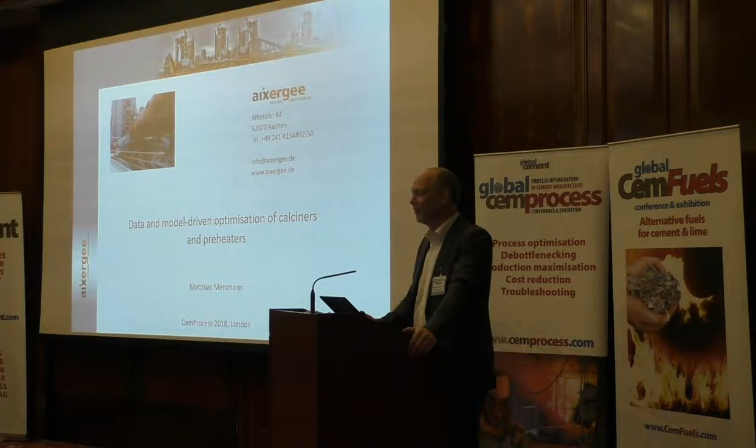Thank you, Rob, very much for this very nice introduction. The hobbies I execute absolutely in that order of sequence, as you have mentioned that. All joking aside, thank you very much for attending this presentation today.

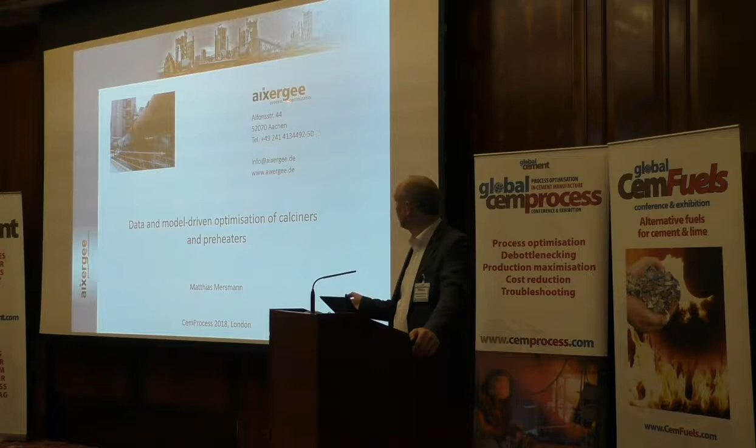Let me spend a few words on aixergee before I get to the content of my presentation today. Some of you know aixergee as a service provider for the cement industry, and we are probably most recognized for our CFD modeling and our CFD consultancy services. That's not wrong, but it doesn't tell the whole story and doesn't reflect our motivation. Our motivation is captured by the term in our logo, which is process optimization. Our main target is to optimize processes, and that's why we are working at the very root of what this conference is all about, the optimization of production processes in the cement industry.

What we carry to the market is know-how, knowledge about the physical and chemical processes involved in the production of cement in all its various steps, from raw material grinding over clinkerization down to cement production in the mills. We focus on the physical and chemical basics of the processes involved, and then we cast this knowledge into models. These models can be of various types - they can be CFD, they can be process models, they can be all kinds of things, and I will show you in my presentation what this means for you.

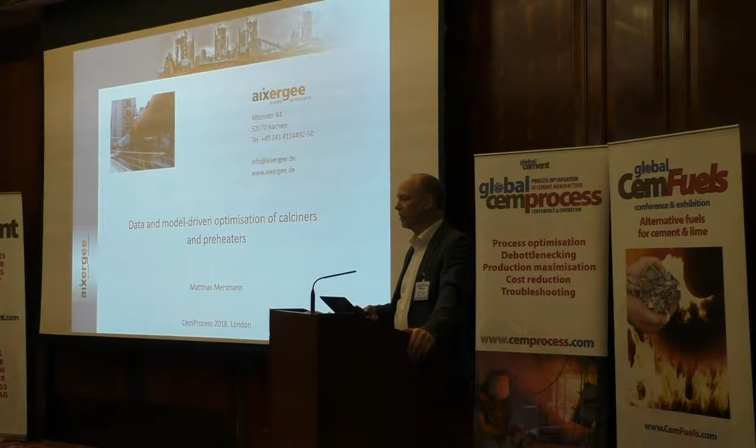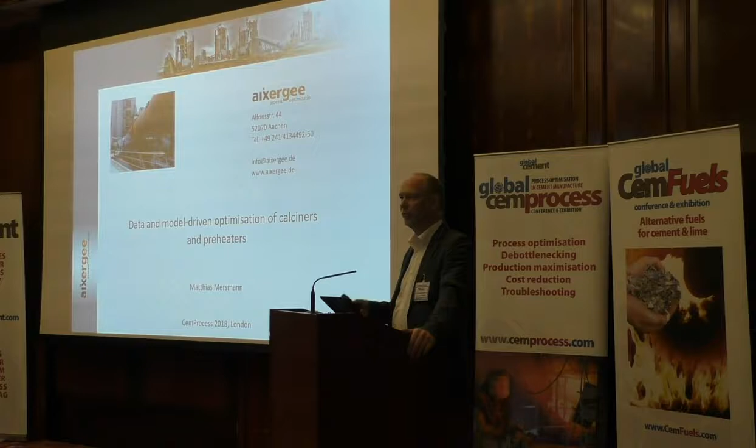We've been listening to the buzzwords already many times this morning. What is driving us these days is Industry 4.0, Internet of Things, machine learning - all these buzzwords. Klaus Beck put it very right when he made a statement just before the break: we have to interpret what does it mean for us. Industry 4.0 - everybody's talking about it, but we as a cement industry have to interpret what this means for us.

In that sense, I am happy to present to you today a new tool which we have added to our toolbox that gives us the position to optimize calciners, preheaters, and other cement production equipment with data and model-driven optimization. Marie has also pointed out in her presentation today that we are getting together all kinds of information on the production process to learn more about it and then to optimize it.

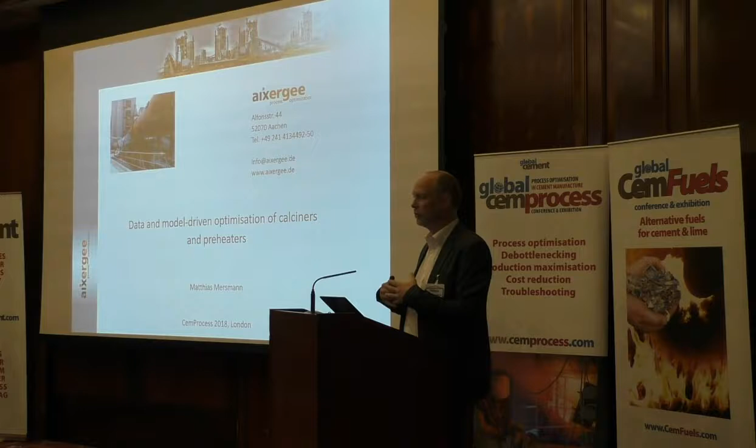Model-driven optimization and data-driven optimization are two different animals. Data-driven means you take the real data and try to analyze what is going on, whereas in model-driven optimization you set up a parallel world, a virtual reality, and then you compute forward how this process would behave. Now we are in the position to marry those two together to mutual benefit and transfer information from one world to the other, steadily increasing our process understanding.

So let me start off with a very funny, maybe unexpected question. What do process engineers and archaeologists have in common? I don't know whether we have archaeologists in the auditorium. We have one specialist in geoscience, I know - so maybe Rob can add something to this discussion. Is it the love of beer? Is the love of beer, and another thing I'm going to talk about.

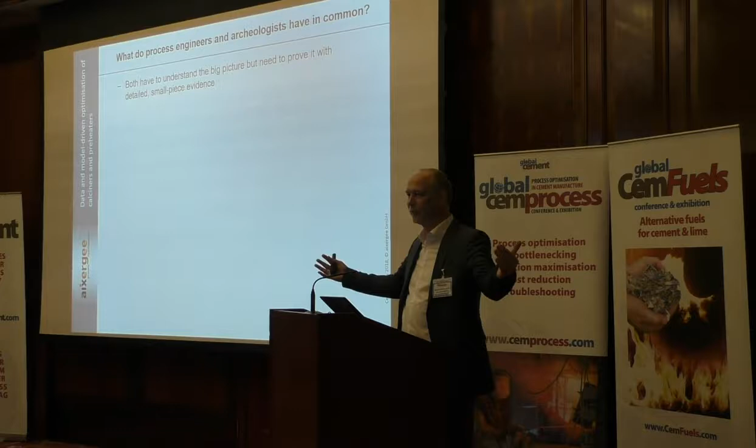You might feel this question to be strange, but I'm going to show you there is actually a lot they have in common. First of all, they both have to understand the whole picture - like, for example, why did the dinosaurs get extinct? But they have to justify and argue that on the basis of small pieces of evidence. If a process engineer is asked the question, why is the kiln capacity limited, why don't we get more out of our kiln, he will be digging for information from the data system of the plant to try and find an explanation why the kiln is getting

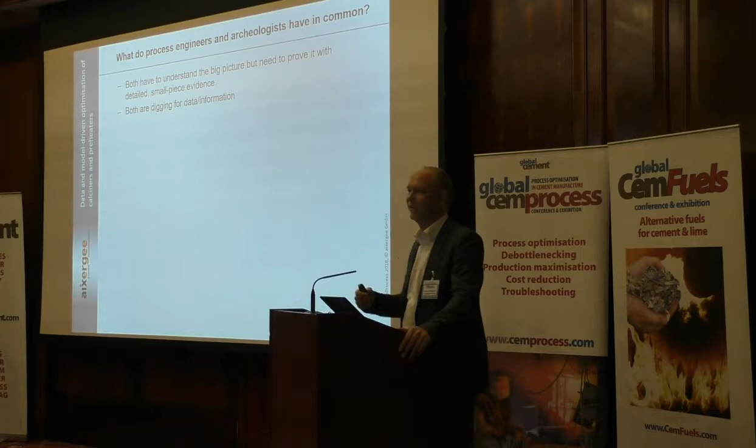unstable and the production is limited. So it's sometimes like looking for the needle in the haystack, and the archaeologist has the same problem. The usual thing we do as process engineers - we spend probably 50% of our time digging data in the process control system and trying to find an explanation. Every time we think we have found an explanation why the kiln got weak, somebody else looks over the data and finds a counter argument and says no, this is not because of that, it's because of that. So that's how we spend our time, and I think many of you know what I'm talking about. It can be very complicated to try to understand and read the data.

So the challenge is where to dig. If you are an archaeologist and you want to try to solve the question why the dinosaurs got extinct, you will probably be looking for a skeleton or a bone to analyze. But the first question is, where do you dig? So where to dig and what is the right tool to find it? Next question is how to dig.

I ask you to transfer this always to our process engineering. If I'm talking about digging, where to dig in the massive data we have. How to dig: better to dig in a big area but only on the surface, or to drill a small but deep hole. To put it into perspective, as a process engineer, if you're looking for the reason of the swinging calciner temperatures, you can evaluate all the data from the complete plant but only in half-hour or middle average values, or you go only for the 10 data points related to the calciner, but then you analyze them for every millisecond. You will get different results from it.

Next thing is how to stay focused. You will be getting lots of data, and I personally know some people in the auditorium we had projects together with, and we spent days and weeks looking into data, analyzing it, and we got confused. We analyzed data till our eyes rolled, and we didn't know where it was left and right and up and down. I think you have the same experience.

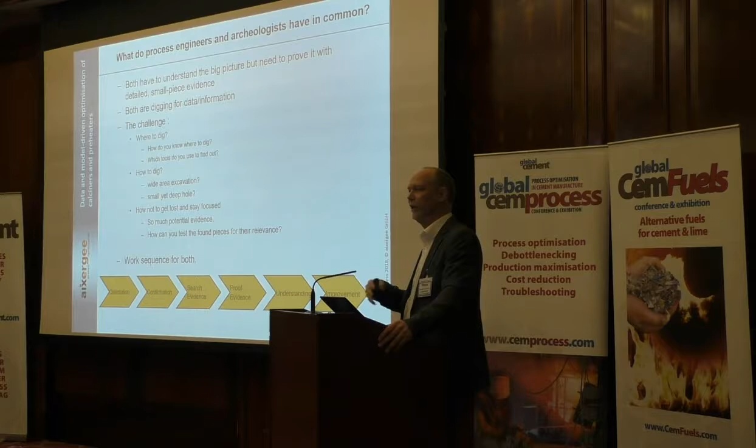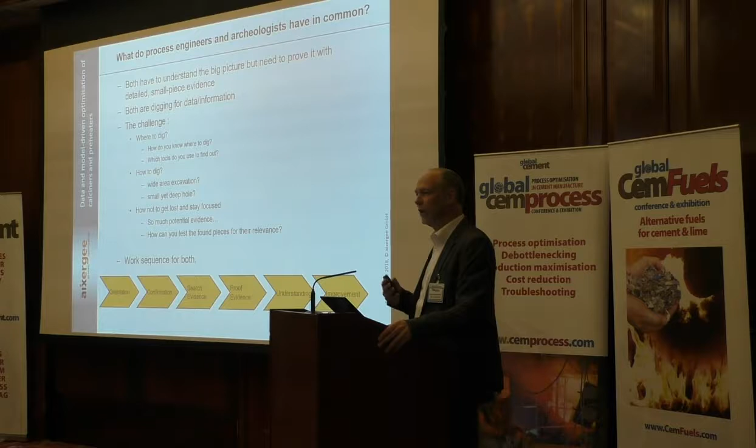I'd like to take you now along this workflow for a process engineer and an archaeologist, and visualize what challenges, what questions will be put. Let's assume, for example, there's an archaeologist who has set up the hypothesis that the dinosaurs got extinct in England because of malnutrition. I don't know why I come to this picture, but we'll see. And a process engineer is trying to answer the question why the kiln production capacity is limited.

So let's start with the first phase, orientation. The archaeologist would first have to answer the question: where to build my camp? Where do I go? Do I go to Chile, to London, or Staffordshire? I don't know. He will be using maybe airplane or satellite exploration to find information on the soil, which gives him an indication this is the right area. The process engineer has the same challenge. He would be asking himself, which are the operation parameters which influence my problem? And there are thousands.

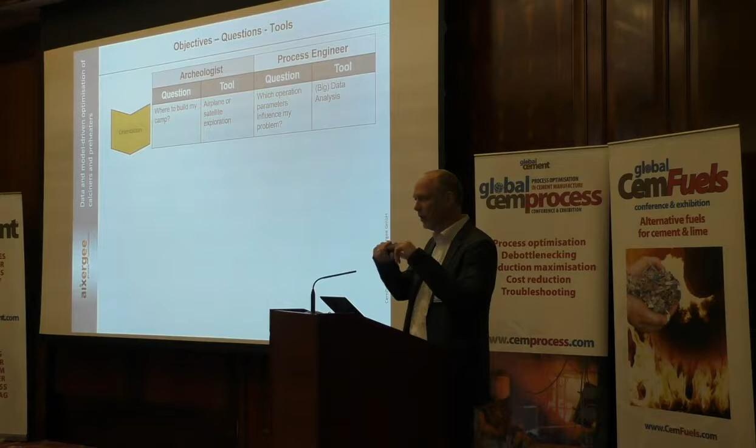The usual way to do it is data analysis. This is where we spend our time: we take trend data from the PCS and then we analyze until our eyes get rolling. And this is the new thing I want to present to you today. We have developed algorithms and tools which help to analyze this data in a certain way. I will give you more details later on.

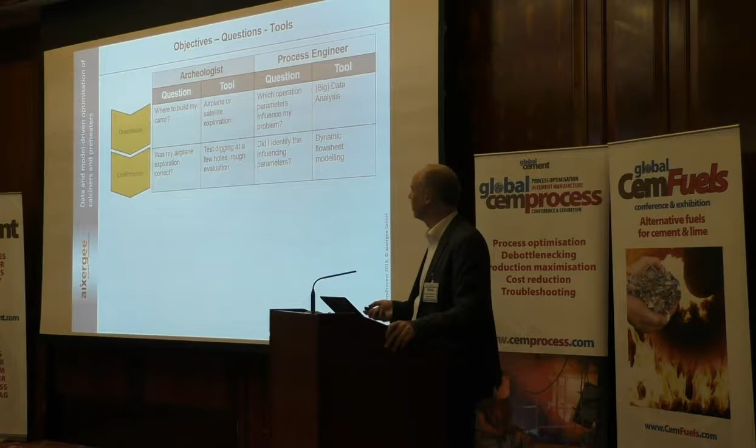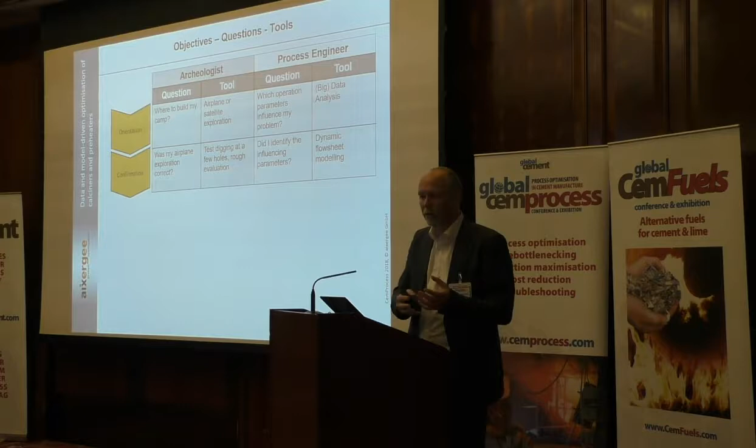Next step, you'd like to confirm that you are digging at the right position. So the question for the archaeologist would be: was my airplane exploration correct? And he will do some test diggings at that ground. The process engineer will have the question: did I identify the right parameters, or am I in the wrong position, the wrong area of the cement plant? We can do that by applying dynamic flowsheet modeling. I will tell you the details later on. Those are tools which we have at hand in our toolbox, which we can apply to such projects.

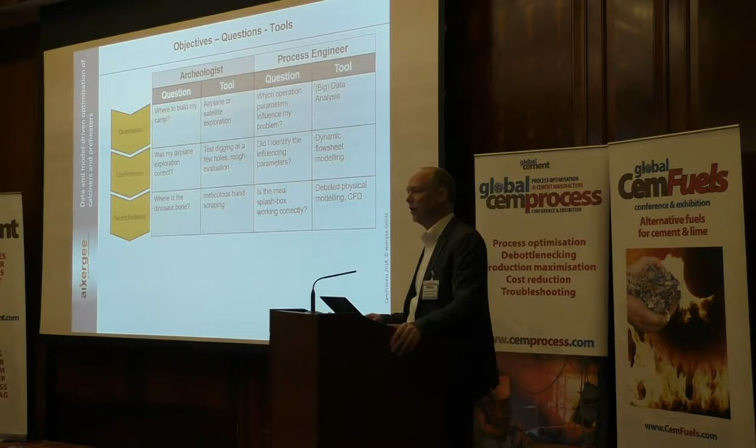The next step is the search for evidence. The archaeologist would ask: where's this dinosaur bone? I want to have a skeleton, I want to have a bone, because I want to analyze it for nutrients and all this kind of stuff. He will take information from this bone, and he will have to hand scrape meticulously, getting down on his knees and scraping millimeter by millimeter until he finds evidence. On this detailed level, we would be using CFD - very detailed, rigid, physically driven, chemically driven, first-principle modeling. For example, if we suspect there's a meal splash box which is not working correctly, maybe this meal box doesn't suspend the meal correctly.

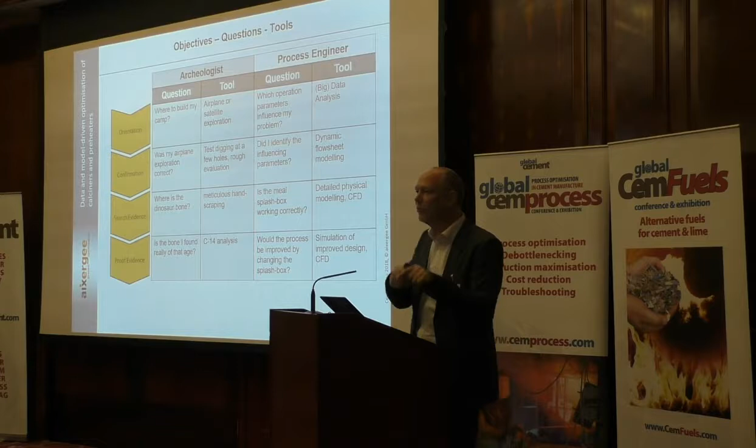This is one detail out of 10 million possibilities in a cement plant. And if you look at the data set from above, it's not so easy to arrive at the interpretation that it's just this meal box that's not working. So then it's also important to prove your evidence. You can find something, but then you still have to show that this is actually the one causing the damage.

So the archaeologist might have found this bone, and he will run it through a C14 analysis, for example, to define the age of this bone, to say, well, this can really be a dinosaur bone, or maybe it's a pig bone that just happened to come to the same place later on. So you have to prove your evidence.

And the process engineer would have to ask himself the question, would the process be improved if I change this splash box? Because if it doesn't change, then obviously the splash box isn't the root cause for this problem. For that reason, he would apply a simulation of an improved design and again use a very detailed CFD to prove that a change of design would actually change the whole process.

And finally, the stage we have to go to is understanding, which requires taking these results, discussing them, and getting them into the bigger picture. Like, for example, the archaeologist would sit down with other experts and say, okay, how could I testify the malnutrition in that bone I found, or maybe there are other reasons why dinosaurs got extinct.

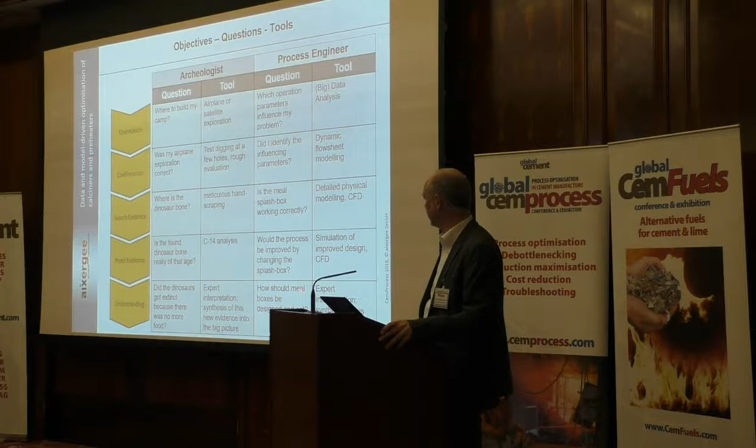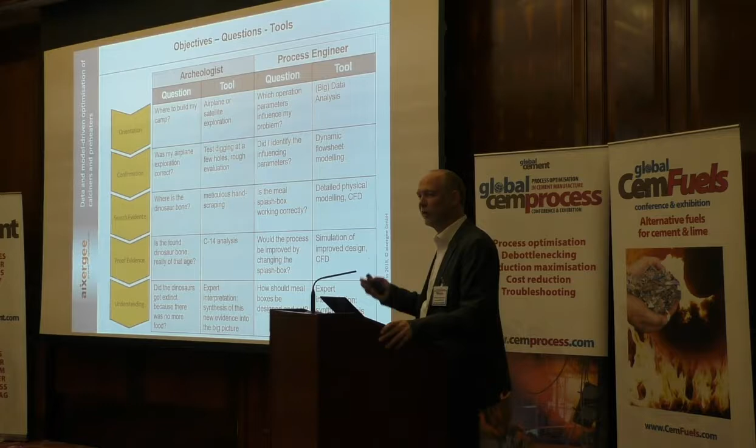And the process engineer would take it to the next level and try to derive from his finding a general rule of how to design splash boxes. He would also have to check whether there is such a thing at all—a general best design—or isn't it more the case that one design would be good for this application and another design would be good for another application. So this is the level of understanding, and that's where we want to go.

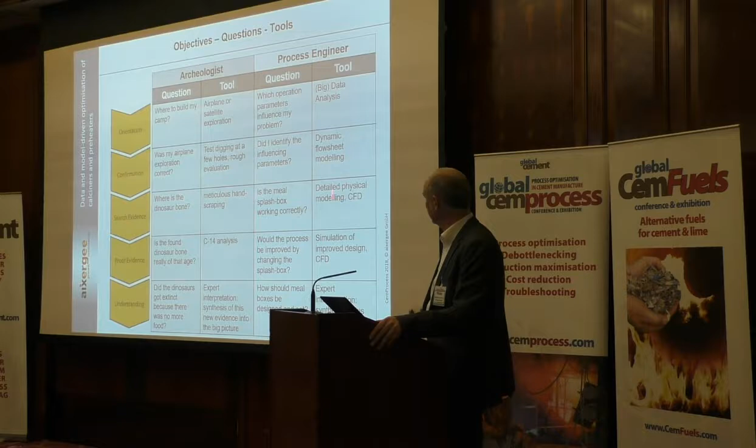And now I'd like to walk you through this step in more detail for the process engineer and show you what the tools are which we can use.

So we're starting again with the same objective. Our kiln production is restricted. We see fluctuation in the kiln operation, and we have to overrun the main burner in order to make sure we're producing quality. It's a well-known problem many people have in their cement plants, and we're trying to find out the root cause for it.

The archaeologist is excavating a wide area. In process engineer's talk, we're looking at the data set of the complete plant. We've been told in the previous presentations, especially the one from Fabio in the morning...

...that, for example, Votorantim, but also other suppliers, are actively pursuing this digitalization agenda, so they will be looking at the complexity of their data and trying to find out how they can extract information from it. Same thing we are doing here.

So we would say, I'm sure the reason for my process limitation is somewhere here, but where is it? Where in the hell is it? Our natural response as process engineers would be to say, if I have a weak rotary kiln, probably it's in the rotary kiln. But if we dig deeper and deeper and deeper, and I look into your eyes, I know you're saying it's right what I'm saying.

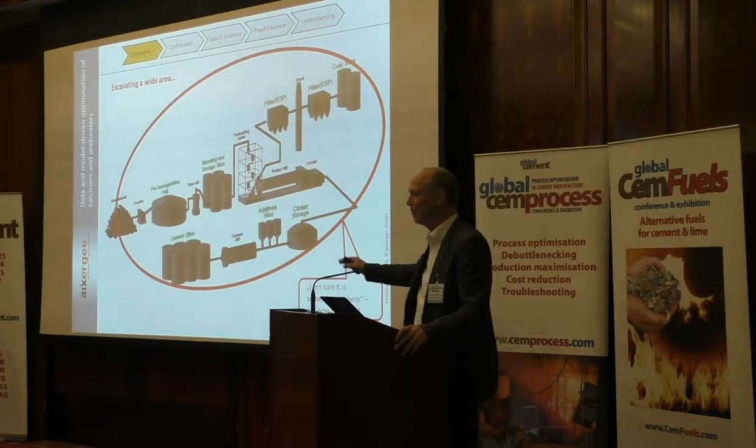Talking about alternative fuels, it's a nightmare. And previously we have been discussing—you have been asked, Mary—wouldn't it be just better to have a stable running process with stable feed materials? Yes, that would be nice, huh? No chance. Reality is completely different.

So potentially all those areas can contain the root cause for our problem. So how do we do it? We usually sit down and evaluate trends. We have 10,000 signals—some of them in seconds, some of them half-hour values, whatever. We sit down, pull up trends, and then we analyze these trends and develop hypotheses, sometimes stranger than the universe.

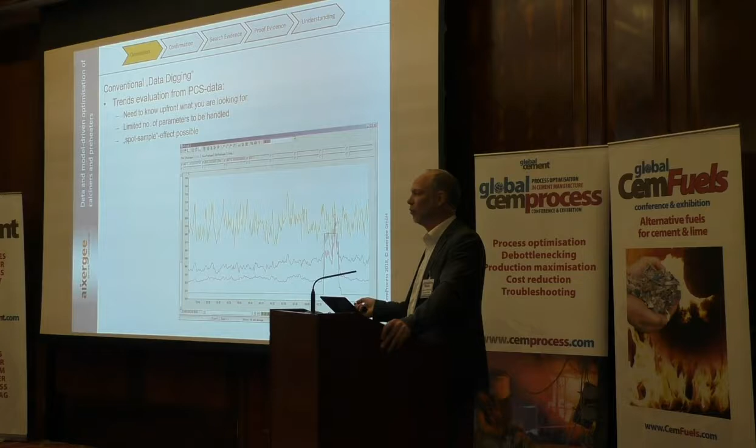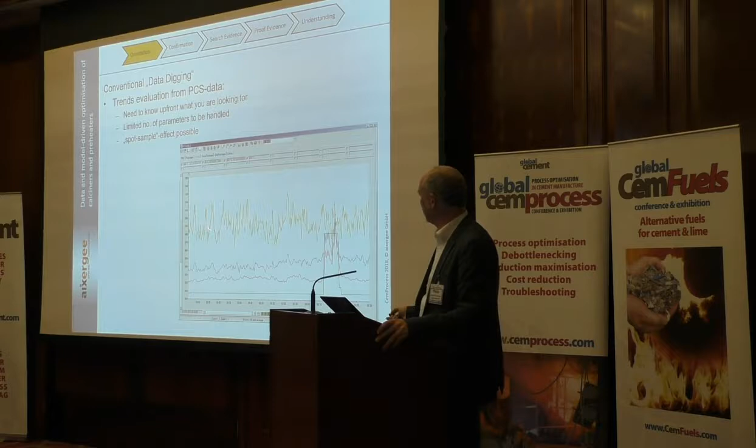The problem is, we automatically connect our knowledge to it. So the trends we put on here, we put them on because we believe they have an influence, but we don't know. And we cannot put 10,000s on it. We can only put 6 or 10 on it, then we lose control. So this is the way we do it, but it's not necessarily the best way to do it.

What we propose here, and this is what we've developed new, is algorithms that help us doing so. So we take a comprehensive data set from the process control system, and we have algorithms in place that analyze them without influence of process knowledge. It's the maximum stupid machine, and it's just trying to find out coherent, coincidental data sets.

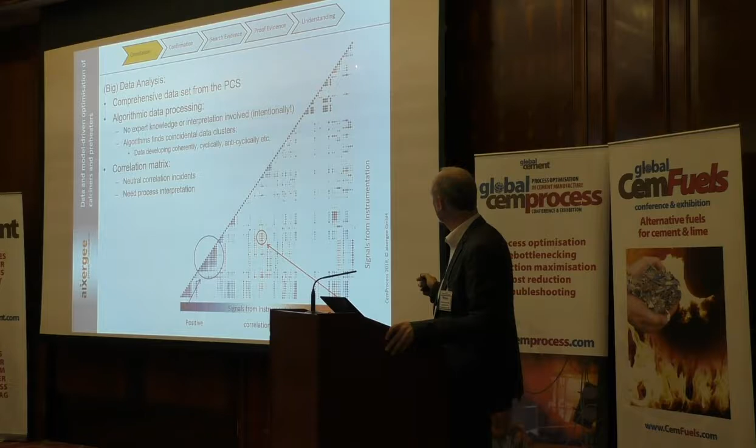So the matrix that is produced by this algorithm can be seen here. It's of course not well visible, but these are the data, the signals set against each other. So like for example, you would have preheater cyclone exit temperature 2 and preheater cyclone exit temperature 3. Do they correlate? Which means, do they go with the same movement or with a counter movement? Do they go in the same frequency or a different frequency?

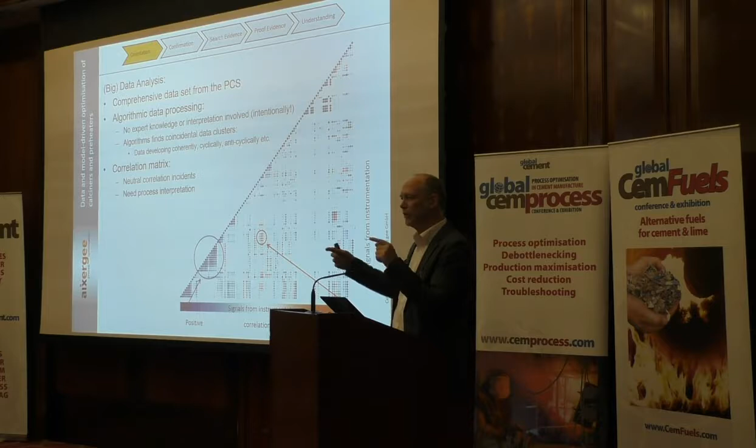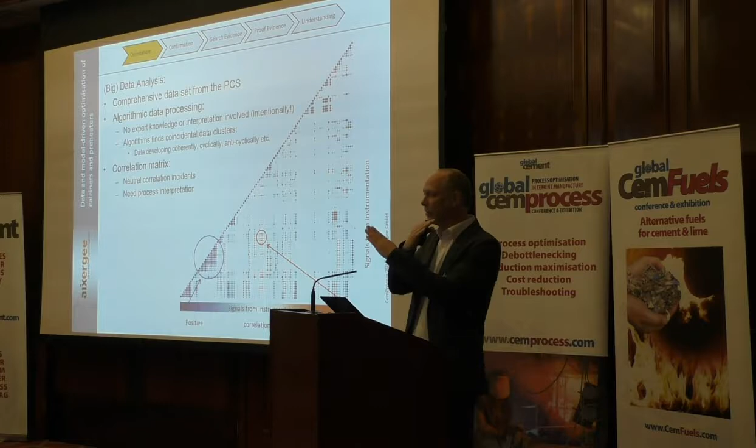There are certain characteristics which are ready to be analyzed on, and what the system does, it displays a big dot if there's a big coincidence, and a small dot if there is no coincidence. And it displays a blue dot if it's a positive coincidence, and it displays a red dot if it's a negative coincidence. So what you then do, you take those spots, those areas where there are big spots, because the functional relationship can either express in a coherent or in an anti-coherent way. So this gives you hints where you should look at.

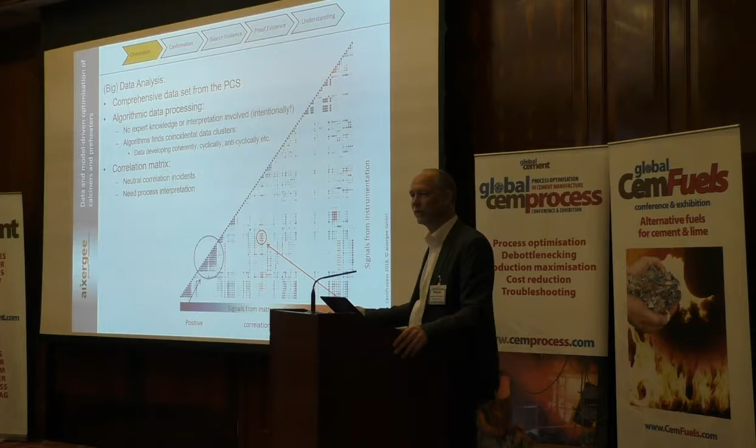This is like an airplane survey for an archaeologist. So this tells us, oh, we have to look here, we have to look here, we have to look here. And all this, of course, relates to measurements, and they relate to process equipment. So now we have narrowed in our territory, and we might have found out that we have to keep on looking for the root cause in this area.

We now use dynamic flowsheet modeling. We insert our knowledge into dynamic flowsheet modeling. The identified parameters and the models are put in place. It's like an Excel tool, but it's more elaborate because it also can use counterflow processes and provides a lot of advantages to use this tool instead of just trying it at the plant.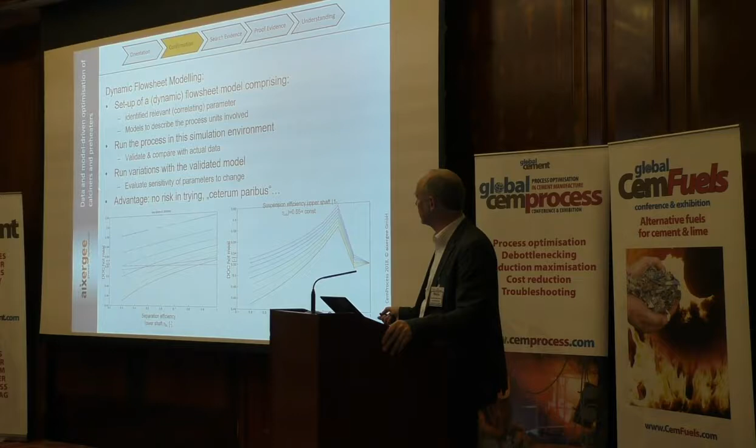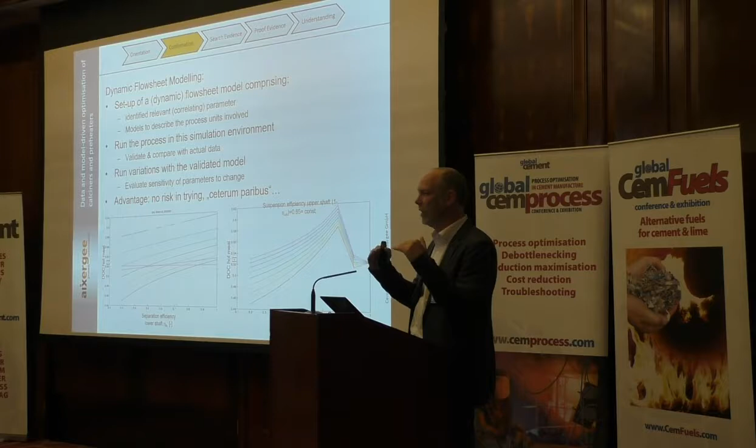You could also go and try it at the plant, but you run the risk of damaging something and you don't get everything, all the other parameters stable at the same time. With this dynamic flowsheet tool, you keep everything alike, you change one parameter and you see the reaction of the process.

And this is an example of such a thing. This is a very strange calciner which we have set up in a dynamic process model flowsheet. You see those red boxes here. These are basic process units like mixing, heat transfer, separation, and all these kind of stuff. So we model the process on basic process units.

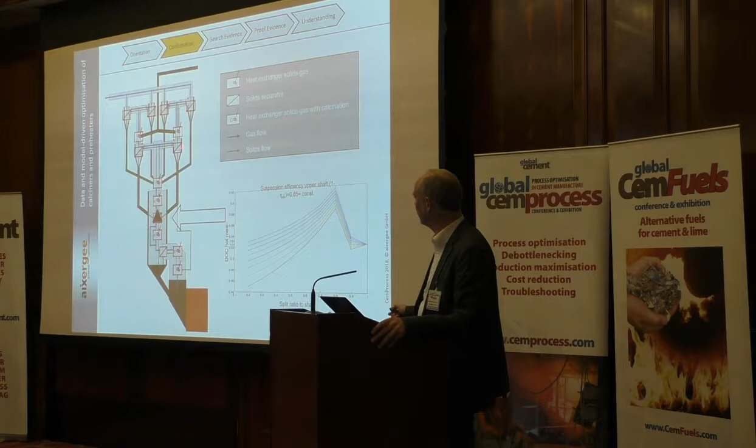And what you see here, for example, is a diagram that calculates the degree of calcination of the hot meal depending on how the meal coming from here is taken upwards or taken downwards. And it's very important. If meal doesn't go down, it doesn't reach here. If it all goes upwards, nothing happens here. So this is influencing your process stability.

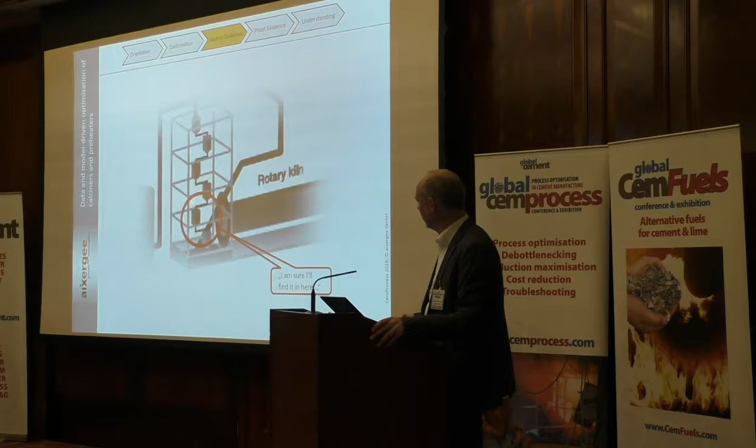So we now have then found out that we have to look at in a detailed level what's happening here. I'm sure it will be here. So next step, we do CFD. And we do rigid physical CFD.

What you see here is the same calciner in CFD. And you see it is being fed with 3 different meal streams here and one fourth meal stream here. And we can identify and track every particle and evaluate where are you going, what time have you been sitting at that temperature, what is your calcination degree, where are you going, you're going up or you're going down.

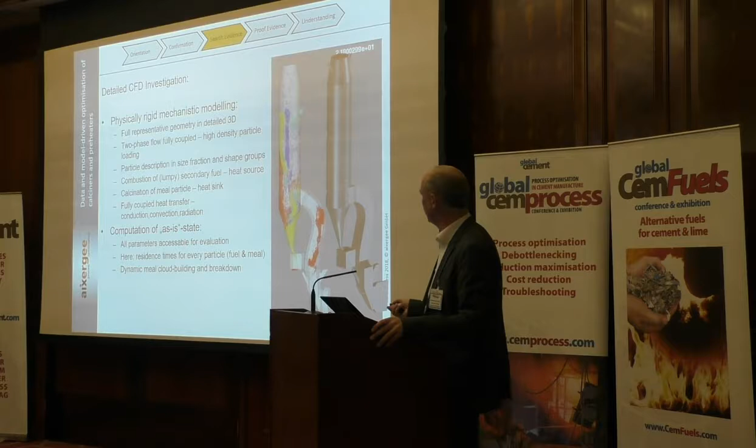So due to the shortness of time I have to hurry up a little bit, but you can surely assess what quality of information we're getting here. And we're taking it even further by not only evaluating it optically, we can evaluate every single meal particle and look after what time, what is your fraction of particles going upwards or going downwards.

And related to that, all the chemical data like calcination degree and all this. We can do the same for fuel. We can ask the fuel particles what is your burnout degree at every time and in every position.

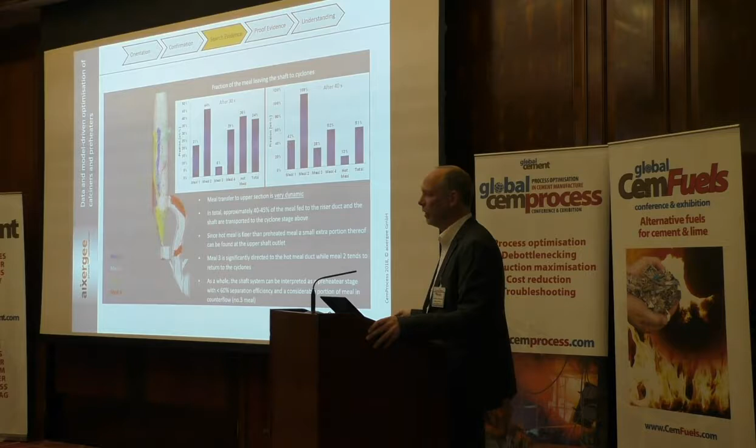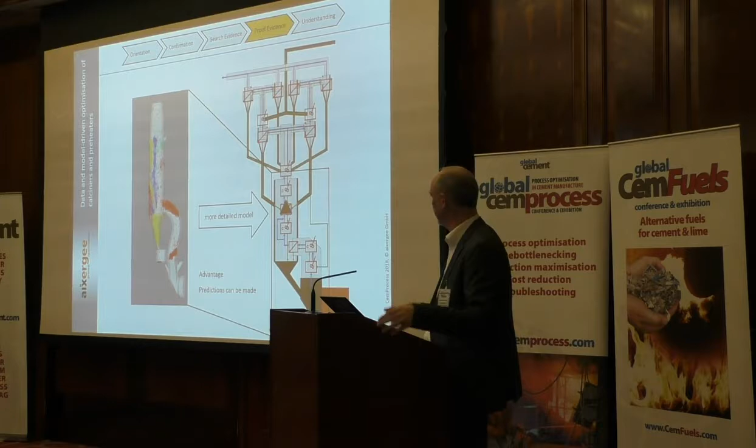Now, having done all the detail, we can transfer this process understanding back into the process level modeling. We will be able to dynamically calculate what's happening in this calciner on a very precise level with very precise knowledge. The big advantage now is we can do predictions. For example, change the type of the splash box and see how the process reacts.

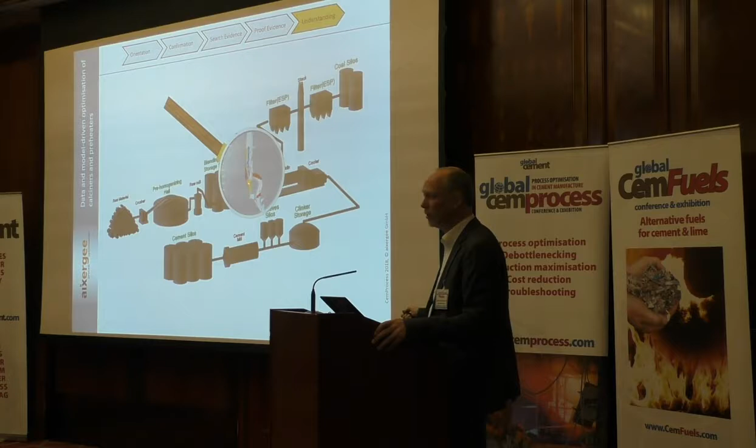So we found out that from the big area, it is important, in this case, to look in detail at the calciner. And this all is summarized into what we call comprehensive model simulation.

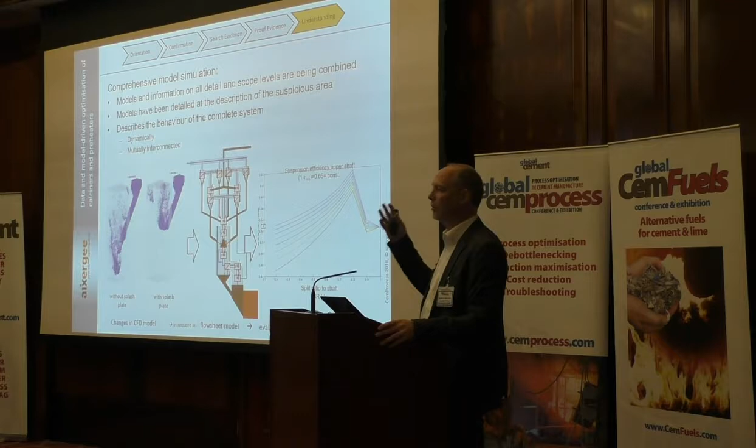If you look here without the splash plate, you will have occasional drop down of meal, which you don't have here. And this makes a difference, and this in reality is the root cause for many kilns suffering from heterogeneous pre-calcination, which makes the kiln operator run the main burner harder, producing more exit gas, throttling the ID fan and limiting your production.

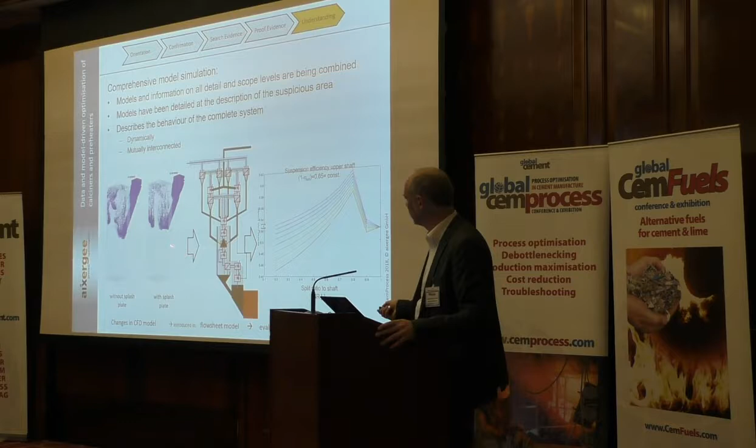In many cases it's a small thing. You don't always need a new calciner - you need to know exactly where the root cause for your problem is. I'm coming to the end.

Data and model-driven optimization can work together mutually and provide benefits. You can exchange information from one world to the other and make use of it. But process optimization in general requires knowledge. Knowledge sometimes hides behind complexity.

I think we know all that. There are two principal ways of knowledge acquisition: data analysis, which is basically a deduction from reality, and model understanding, which is basically the simulation of reality. And then you can marry those two worlds together - they can be combined. The keywords here are artificial intelligence, model-based interpretation, machine learning, all those buzzwords you know already.

Important is you'll have to apply your scrutiny to different levels of detail and to different widths of application. You have to play with it. You have to exchange those things from one world to the other.

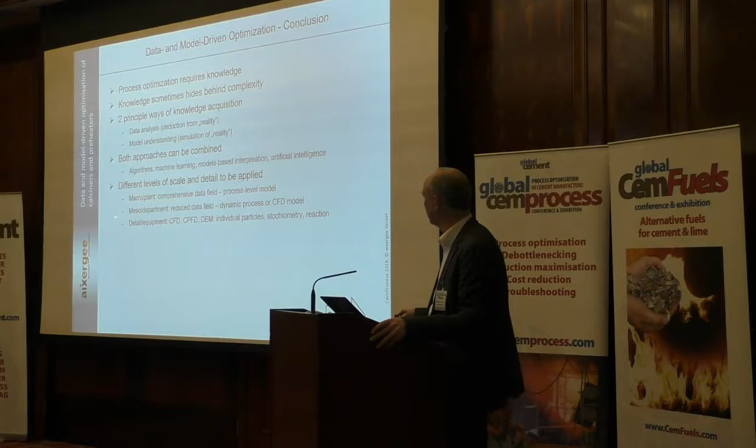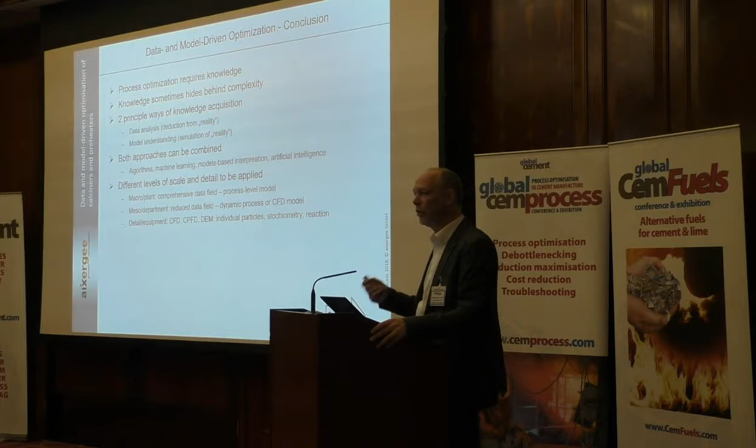There's the plant level, which we would answer with a process level model. There's the meso or department reduced data field, which we go dynamic process modeling or CFD, and then there's detail up to every molecule. If you go for emissions, for example NOx or something like that, we go for every molecule.

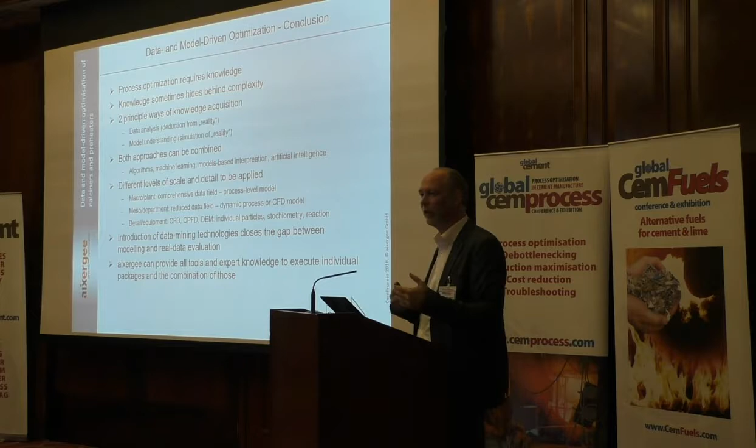Introduction of data mining technology is now available, closes the gap between modeling and real data evaluation. We are in possession of all these tools and can combine them. We have actually used all those tools, although not together in one project, and we will only use those models which are actually necessary and especially commercially, cost-wise necessary.

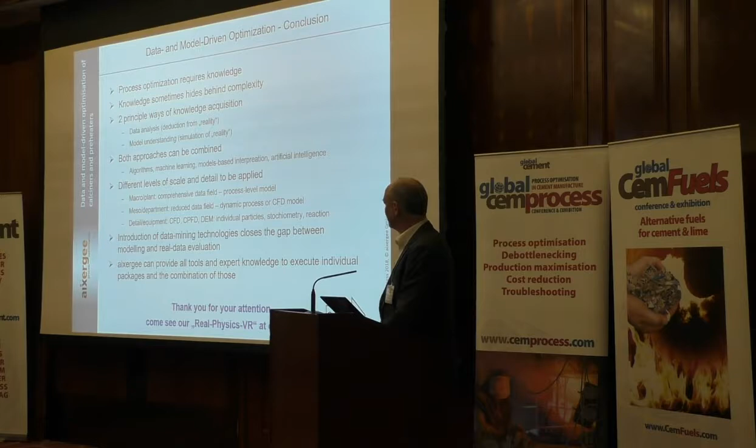Thank you very much indeed, Matthias, for a very interesting insight into what can be done to model processes in the cement plant. Just before I get on to the specific questions, did I understand that you set up a model flow sheet, use the predictions from that to inform your CFD modeling, and then the results from the CFD modeling are put back into the model flow sheet? Okay, so I'm not wrong there. But does that not extend your connection to the original data too far?

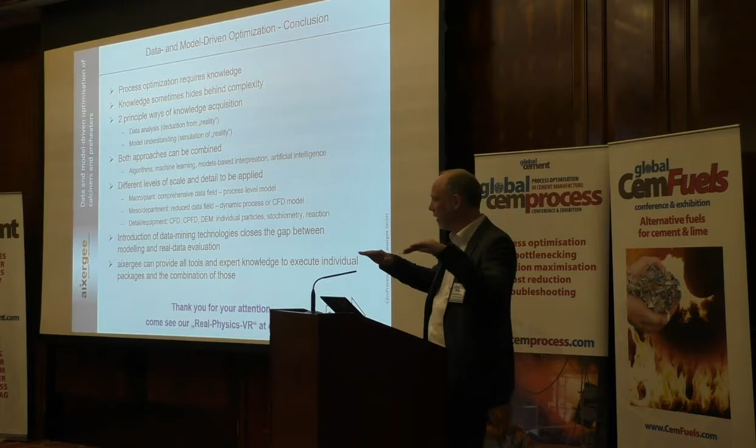Whether we talk about process model, flow sheet model, or CFD model, those are platforms only. What is important is to transfer the knowledge you gain from one world to the other, and give it back again. So we're talking about width and depth. CFD is always very deep, but of course CFD cannot be wide. Process is always a little bit wider, and on top of that we have data mining. It's a matter of combining wide and deep technologies.

We have some very specific questions here. One is from Paul Flashkamp: how long does a typical project of yours take and what needs to be invested? And Mark asks, where does the information come from to build the model? A typical project runs for about 3 months. Complex projects can go over a year.

The cost, if we use these technologies, will usually be north of 20,000, and on top there is no limit because it depends on how many iterations, how many runs, how many models we have to build. Where do we get the information?

Like in the data mining example I showed, we sit down with the client and tell him what kind of data we need. In this case things can be very easy because we actually take all of it, since it's a machine algorithm and we don't have to compute it ourselves.

For the CFD, I think this question relates to a very critical point: rubbish in, rubbish out. The CFD model is nothing else but giving physics and chemistry space to act in—we only define the physical and chemical rules, and then we push the button. What comes out as a result, we don't know up front. If we put the wrong boundary condition, or the wrong start position, the result will not be representative. So we take extra care, and there are ways to do it, to start with the right boundary conditions.

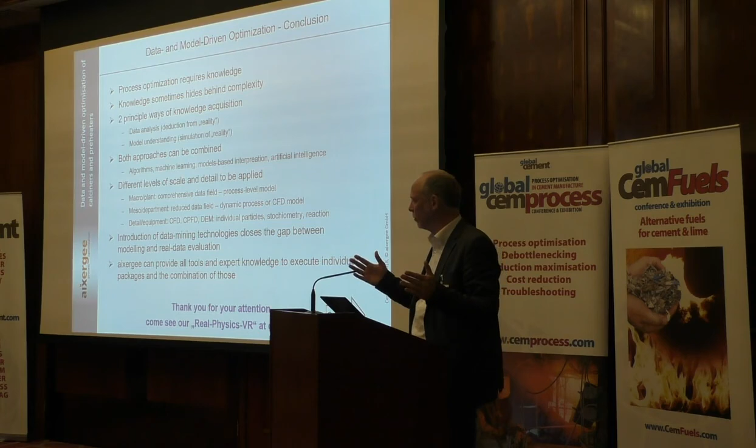But the maximum extent of that particular analysis was 20 seconds. So could you run that forward by one hour and see whether things have stabilized? Good question. From the data analysis we see the type of correlation, and if it says there's a cycle coming up running for 20 minutes, we can of course run the simulation for 20 minutes. But to stay economical, we'd have to reduce the level of detail only to the parameter we are chasing, in order to run a simulation over 20 real-time minutes at a cost that can still be borne.

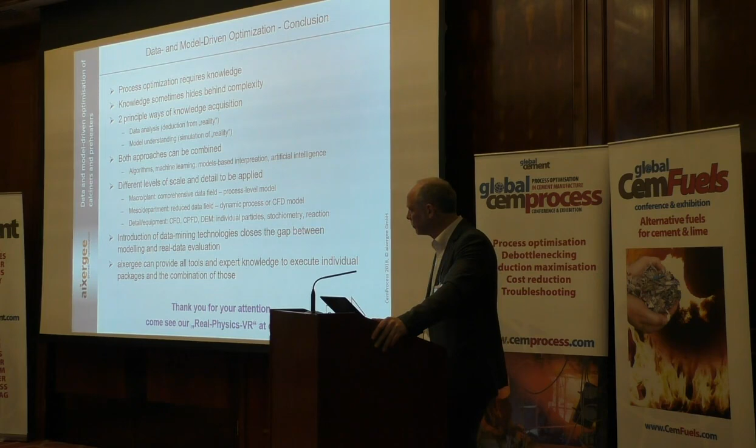So the final question: did they put in the new splash plate? Yes. What was the result? Yes—the splash plate thing is an archetypal problem, and we have solved, I think, at least 10 or 20 problems in cement plants by introducing small scale splash plate or brick lining splash geometries, and it helped tremendously.